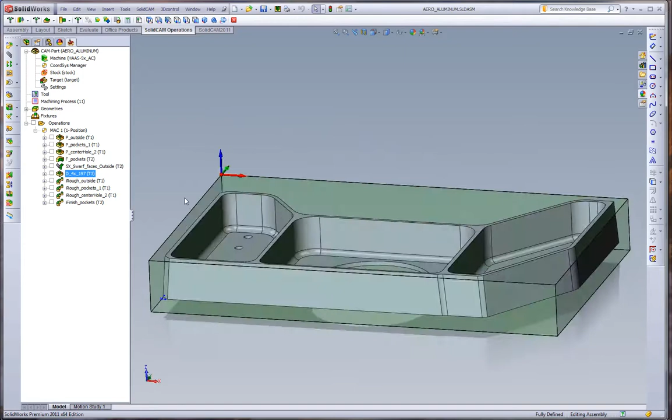So what we have here is an aluminum aerospace part. It is basically a 3-axis part, minus the outside cut, which has a 5-axis taper to it. We'll run through the simulation first on the standard cuts, and we'll take a look at what we're comparing. We'll move to our SolidVerify.

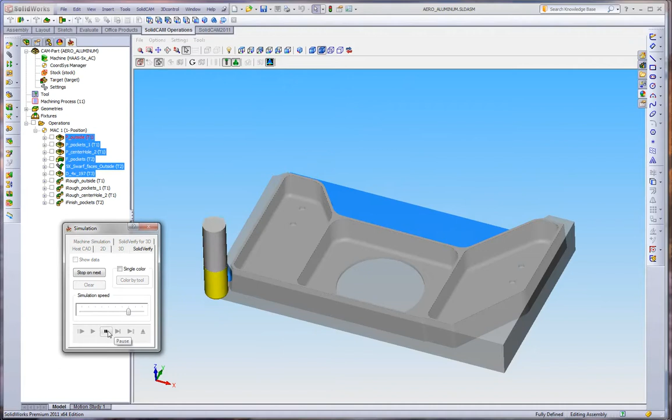Now the first thing we're going to do is rough out the outside. We'll take a look at the part as we're going through the simulation. So the first cut is roughing the outside shape from the aluminum stock. After that, we move to the center pockets. You can see going from the left pocket to the middle pocket and then to the right pocket.

After that, we're going to machine the center through hole. After we're done roughing, we're going to use a smaller end mill to finish the walls on the inside pockets. After that, we're going to use a 5-axis swarf cut to finish the outside tapered surfaces, as we see here.

And then finally, when this is done, we're just going to have a simple drilling operation to put in these 4 .197 diameter holes, as shown. So now let's go compare what we have.

We're using 3 tools to do this. We're using a 3/4 inch with a .125 corner radius 2-flute carbide end mill, as we can see on my mouse. We're using that for the bulk roughing. We're then using a 1/2 inch with a .125 corner radius to finish the outside and the inside. And then finally, we're using a .197 drill to finish the 4 holes.

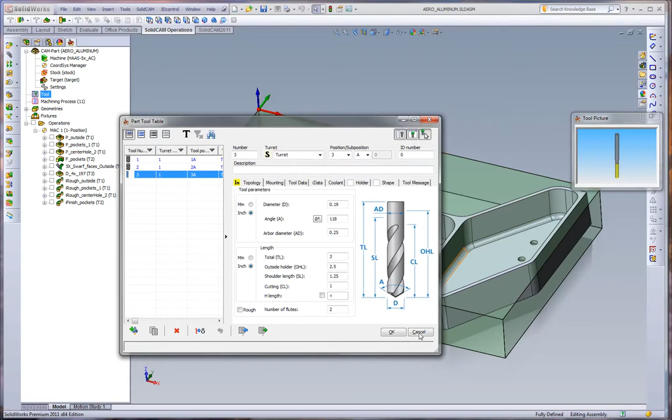Now let's compare what we're doing with standard pocketing. The first operation, we're doing a 200 thousandths depth of cut. Our feed rate for this is 8,000 RPM at 100 inches a minute. If we go to our second cut for the center pockets, using the same tool, same feed and speed, 8,000 RPM, 100 inches a minute, and we're doing the same 200 thousandths.

In this operation, we're also finishing the floor with the bull mill, so we have a 15 thousandths floor offset, and we are finishing with the same tool. For the center hole, we are doing the same 8,000 RPM. The only difference here is we're also finishing the wall. When we are finishing the inside pockets, we're switching to the 1/2 inch end mill. We're still sticking with the same 8,000 RPMs and 100 inches a minute.

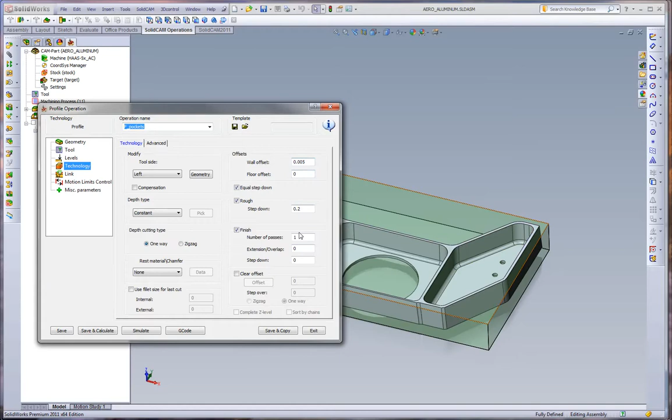When we go to our technology, we're doing a 200 thousandths step down still. However, we are doing a rough and a finish at the same time. Because of the excess material left over in all the corners, we can't just go right to finish size. We have to take a rough cut, which is 5 thousandths away, and then a finish pass, which is to size. And if we go to the SolidVerify and take a look at this, it'll be quite clear what's happening.

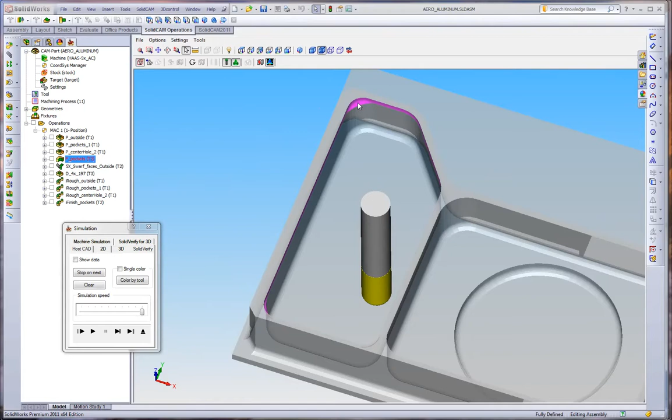So as we zoom into this one pocket here, and we single step through, and we'll just do one level, we can see that in some of the corners we have excess material from the larger tool. On the straight walls, of course, we only have our 5 thousandths wall offset that we define. But because of that, we want to do a rough and finish to bring that wall into size.

The 5-axis swarf cut is doing the same thing as the pocketing. It's a 200 thousandths step down, 8,000 RPMs, 100 inches a minute, and the drilling is working at, I believe, 2,000 RPMs and 15 inches a minute with a straight peck.

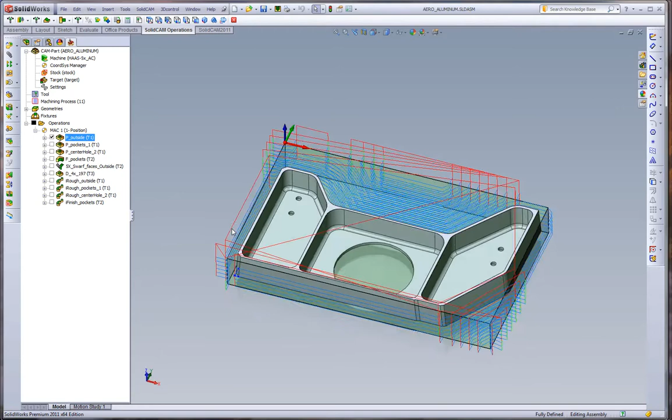Now, what we want to compare is the difference between iMachining and standard pocketing. If we look at the standard pocketing toolpath, we can see we have multiple step downs, the 200 thousandths, and our step over. We see many repositions to continue with climb cutting. If we look at that same cut with iMachining, what we see is no retracts. In iMachining, we're also going full depth of cut. We are doing a smaller step over because we're going deeper. However, the tool is staying engaged longer.

If we go and look at the feed rates that we're running here, we're running a little less than 7,000 RPM, so a little bit less than the standard pocketing, and we're running 100 inches a minute. Those are the values generated from the wizard.

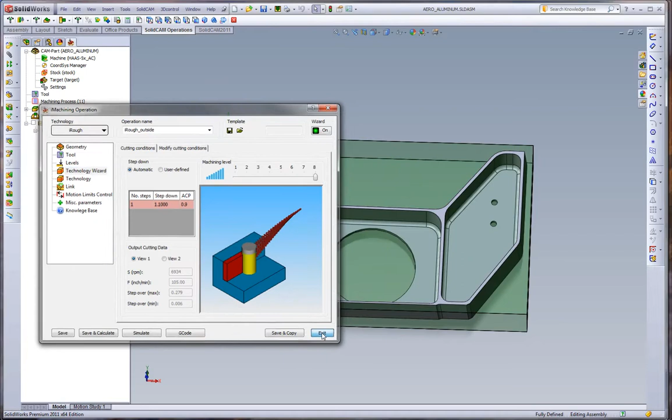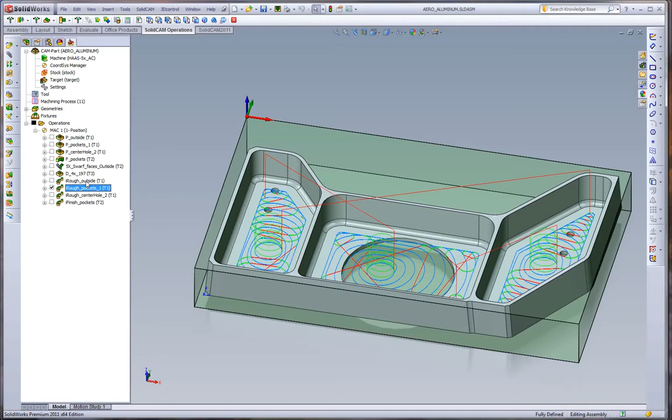If we look at the inside pockets, you can see we have our standard offset style strategy, once again doing multiple step downs. If we go to the iMachining strategy, we're doing a single step down once again. We have our helical entry, just like the standard pocketing. Both are using the same helical angle, 5-degree entry ramping. The difference here, as we see with iMachining, is one step down, very few repositionings. We're running the same feed rate again as the roughing, less than 7,000 RPMs and roughly 100 inches a minute.

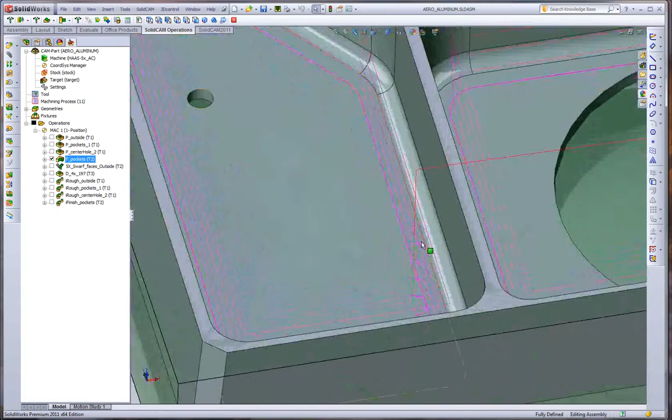If we look at the roughing of the center hole, it's basically the same as the roughing of the previous operations. Now the finishing, this is where things get a little interesting. If we look at the profiling operation, as we see, we have double passes around the entire part to try and achieve our rough and finish.

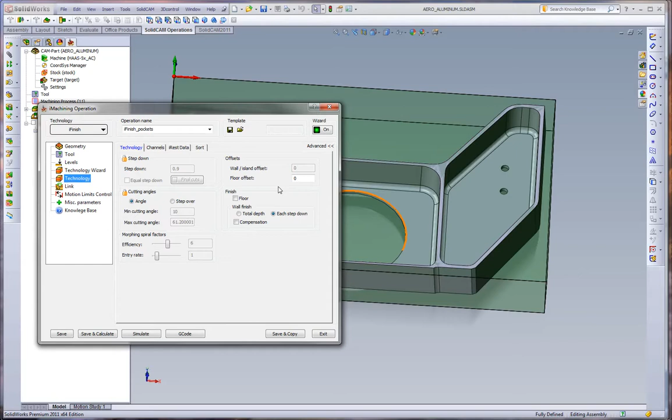When we look at iMachining and iFinish, we do something very special here. What we do is we analyze the entire geometry. We look at where the leftover material is. As we see here, we have our parent operation, which was the rough pockets. It knows the previous tool, wall offset, and fillet radius. And what we do is we analyze where there's excess material. What we're trying to achieve is a final finish pass around the entire contour that is just removing the wall offset.

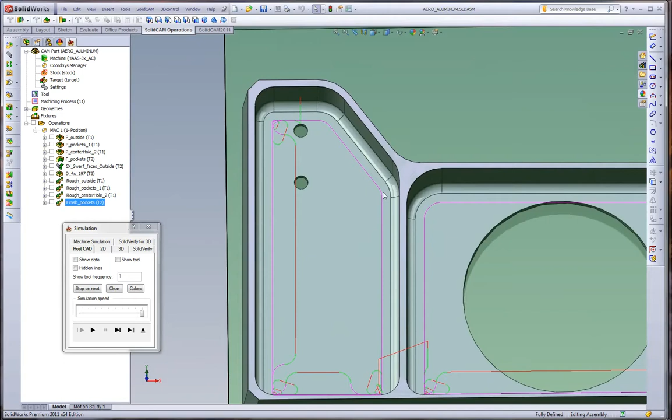So if we were to go and look at this toolpath, what we're going to see is any of the corners that would have had the toolpath being over-engaged, we are now finishing those areas first with a roughing toolpath. So we see the corner here, the corner here. As we look at the large corners, where the tool would be able to still take the wall offset in one final pass, there's no toolpath.

So the difference here is iMachining is able to intelligently analyze the contour, machine just the areas it needs to first to prepare for one single step down at the end. This is very unique to iMachining. No other software has this. This allows us to take one final pass at full depth of cut because we know we're getting full stability with the end mill and that the tool is not going to get over-engaged in any of the corners because iMachining took care of it.

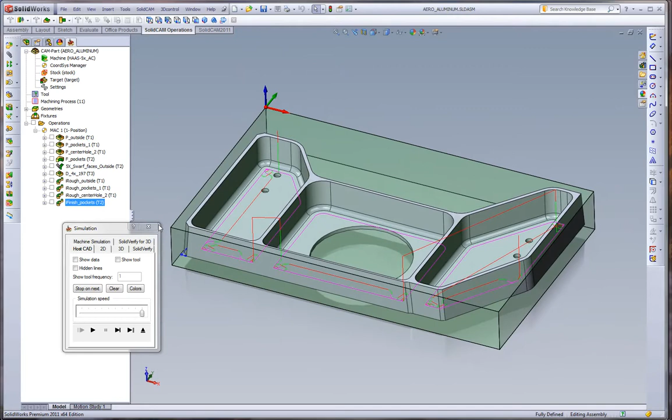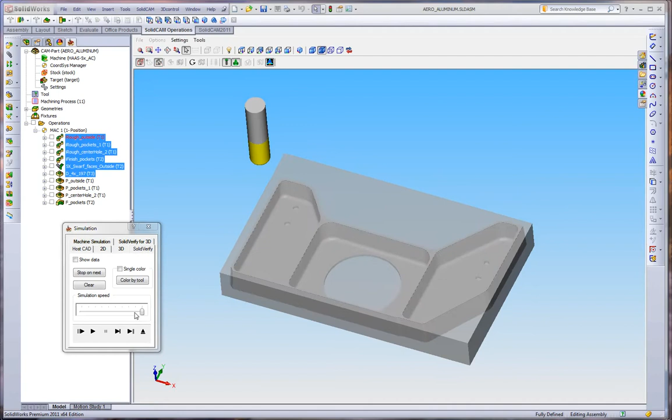We can go take a look at the simulation and see what's the difference between iMachining and the standard pocketing. We'll reorder these operations so we don't have to simulate them. Go to our SolidVerify. Once again, let's look at our part while the simulation is going. So with iMachining, you can see it progressively shave the stock away from the outside. As we see it do the center pockets, we see it helical enter, and then we see it clear away the material at full depth of cut.

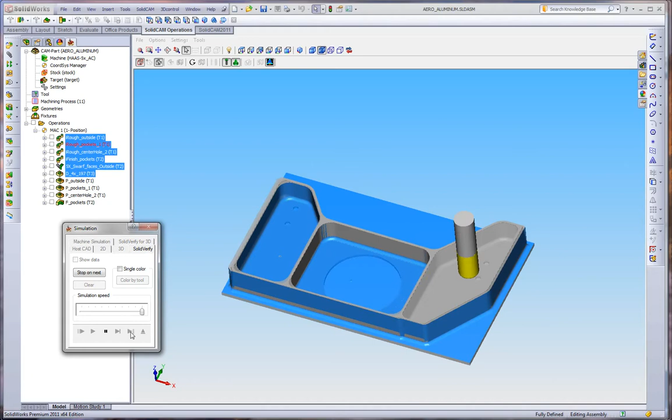Working from the left pocket to the center pocket, and then finally to the right pocket. As we can see, progressively shaving away the material the entire time. We still have the finishing pass that we're using with the iMachining, same as we did with the standard pocketing. After the three main pockets are roughed, we're then going to switch over and do the center hole.

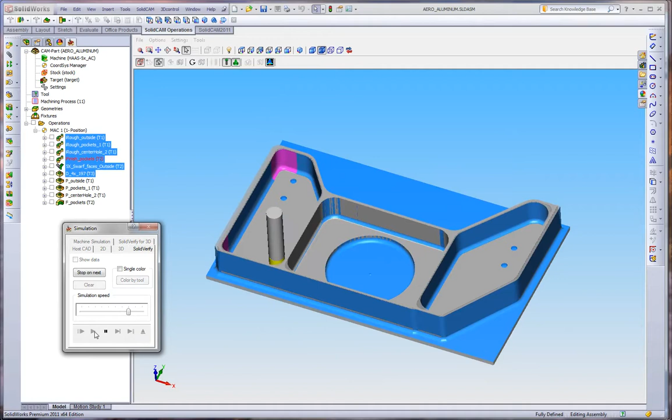And let's slow up and watch the iFinish toolpath work with the smaller half-inch tool. What we're going to see is it clears out the corners and gives one final preparation pass. And as we had with the standard, we're still using a 5-axis swarf cut to finish the outside.